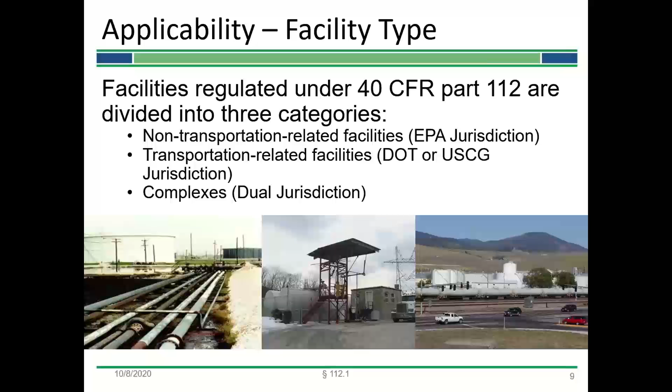All right, so first part of applicability is facility type. We look at facility type based on three categories, which are non-transportation related facilities, transportation related facilities, and complexes. So let's discuss each in a little more detail.

Non-transportation related facilities are those at which EPA has jurisdiction, and these are going to include the fixed or mobile onshore and offshore drilling and production facilities, oil refining facilities and oil storage facilities, various types of facilities that store and use oil on site, waste or used oil treatment facilities, facilities that have equipment used to transfer oil in bulk to or from highway vehicles such as tank trucks or railroad cars, as well as transportation of oil by highway vehicles, railroad cars, and pipelines within the confines of a non-transportation related facility.

Transportation related facilities are those that are going to have jurisdiction by either the Department of Transportation and PHMSA through them, or the Coast Guard. Examples include terminal facilities with equipment to transfer oil in bulk to or from a vessel, including the reception and storage of any oily ballast water.

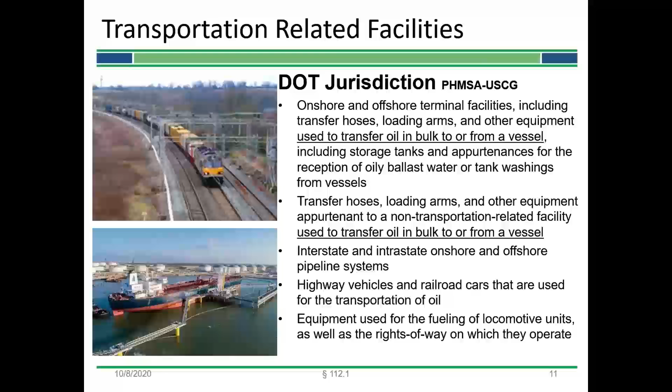Also includes the equipment at a non-transportation related facility that is specifically used to transfer oil in bulk to or from a vessel. This would also include any pipeline systems, highway vehicles such as tank trucks and railroad cars that are used for transporting oil, and equipment used to fuel locomotive units.

Now, complexes are going to be a combination of these, and a facility that has both transportation and non-transportation related components will be considered a complex. And based on the type of activities being conducted there, the facility would then be subject to jurisdiction by more than one federal agency.

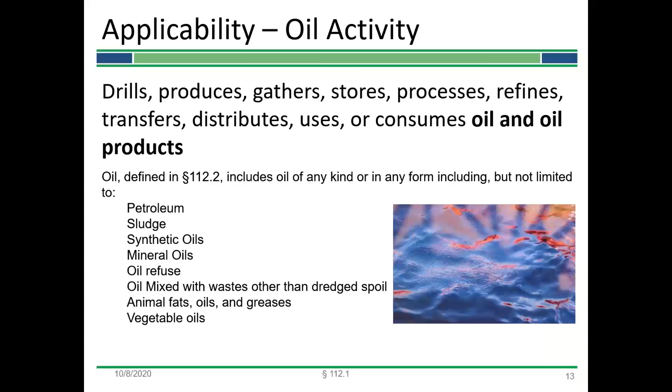The next part of applicability we're going to look at is the oil activity. So applicable activities are drilling, producing, gathering, storing, refining, transferring, distributing, using, or consuming oil and oil products. And when we're considering what is an oil for these activities, the rule defines oil to include oil of any kind or any form, such as petroleum, sludge, synthetic oil, mineral oil, animal fats and related products, and vegetable oils.

The next key for applicability is the reasonable expectation, and this is covered in 112.1(b) of the rule. You want to look at if the facility can be reasonably expected to discharge oil in quantities that may be harmful into or upon navigable waters. And if you have any questions or want some additional information on navigable waters, these can be found at

epa.gov/NWPR. So as defined in the SPCC rule, a discharge is going to include any spilling, leaking, pumping, pouring, emitting, emptying, or dumping of oil, regardless of where it occurs. Now, there are some exemptions, though, such as discharges associated with Section 402 of the Clean Water Act and Section 13 of the River and Harbor Act.

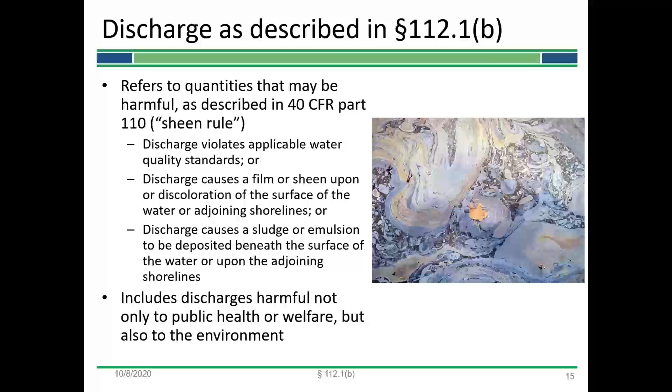So as I said, a facility has to be reasonably expected to discharge oil in quantities that may be harmful. And in this term, we refer back to the Sheen rule, so 40 CFR Part 110. May be harmful is considered as for discharges that violate water quality standards, cause a film, sheen or discoloration on the water surface, cause a sludge or emulsion beneath the water surface, and there could be others as well. And these include discharges that are not only harmful to public health and welfare, but also the environment.

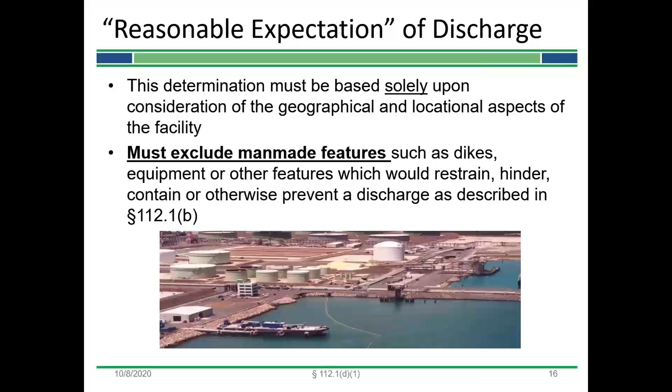So the owner or operator is going to make the determination of whether or not the facility has reasonable expectation of a discharge. When making this determination, though, it must be based only on aspects related to the geography and location of the facility. So any man-made structures like dikes and other equipment and features at the facility that would otherwise prevent a discharge or restrain it cannot be considered as part of that determination. Really important.

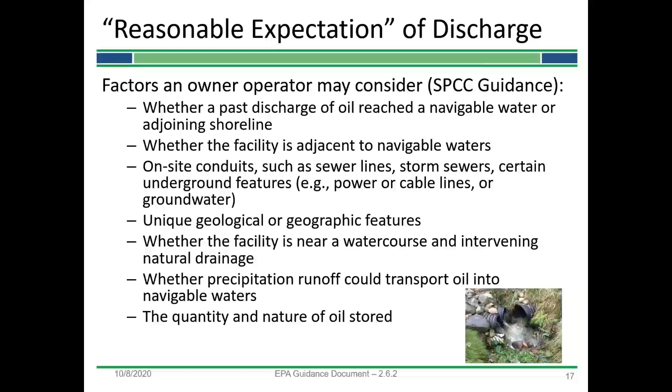However, the owner or operator may consider with this determination any past discharges of oil, if the facility is adjacent to a navigable water, any on-site conduits that could connect to a navigable water, like storm sewers and groundwater, any unique geological or geographic features at the facility, such as maybe the depth of groundwater or natural sloping, if the facility is near a waterway and any natural drainage, if precipitation could transport oil off-site, as well as the quantity and nature of oil stored at the facility.

Now, the last part of SPCC applicability is the threshold, and this is going to be the facility's total oil storage capacity versus the SPCC threshold. SPCC requirements are going to apply to those facilities with greater than 1,320 gallons of above-ground storage or 42,000 gallons of completely buried or underground storage. And in order to determine that total oil storage capacity, the facility needs to count all oil storage containers with capacities of 55 gallons or greater, and these would include oil-filled equipment. However, there are some exemptions that we're going to go over where certain containers would not need to be included as part of this calculation.

Now, when we look at storage capacity, we're referring to the shell capacity of the container based on its design. It's not going to be the operational amount of oil that a facility actually stores in the container. This is really important. And if a new container is brought on site and has never stored oil, it does not need to be included as part of that total oil storage capacity until it is brought into service.

There are exemptions for permanently closed containers as well, but the container needs to meet the definition of permanently closed under the rule. And this means that all liquid and sludge have been removed from each container and connecting line, and all connecting lines have been disconnected and blanked, all valves closed and locked, and conspicuous signage is posted on the container stating that it is permanently closed, not out of service, permanently closed, and the date of closure.

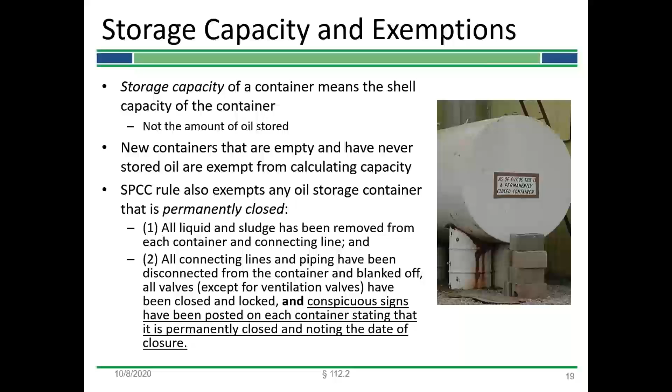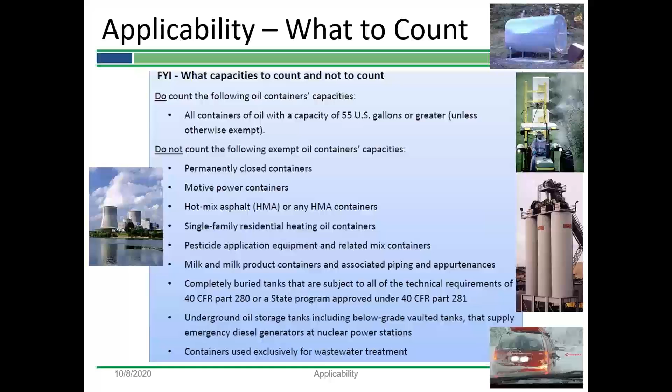So overall, when determining what to count and what not to count when you're making this calculation, as we discussed, you do want to count those containers with individual capacities of 55 gallons or greater. But you do not need to count containers that are permanently closed, like we discussed, as well as motive power containers, hot mix asphalt containers, single family residential heating oil containers, any containers used for pesticide application and mixing, containers that store milk or milk products, completely buried tanks that are subject to all of the technical requirements of EPA's UST program that's covered in 40 CFR Part 280, or a separate state program that's going to be approved by EPA under 40 CFR Part 281, USTs that supply emergency diesel generators at nuclear power stations, and any containers that are used exclusively for wastewater treatment.

In addition to SPCC applicability, a facility is also going to be subject to facility response plan requirements under the rule if they meet certain substantial harm criteria. And these are going to be based on storage capacity and level of harm. So according to the rule, a facility may pose substantial harm if it has 42,000 gallons or greater of total oil storage capacity and transfers oil over water, or it has greater than or equal to 1 million gallons of total oil storage capacity and meets at least one of the following conditions.

So greater than or equal to 1 million and lacks sufficient secondary containment within any above ground storage area, greater than or equal to 1 million and located at a distance where a discharge from the facility could cause injury to fish, wildlife, or sensitive environments, greater than or equal to 1 million and located at a distance where a discharge from the facility would shut down a public drinking water intake, or greater than or equal to 1 million and the facility has had a reportable discharge greater than or equal to 10,000 gallons within the last 5 years.

So facilities that meet this criteria would then need to prepare an FRP in addition to an SPCC plan. The FRP is going to have additional requirements and must be submitted to EPA for review and approval. And overall, all facilities must complete the certification of substantial harm found in the regulation and maintain this at the facility, regardless if they are FRP subject or not. This is going to be what documents that the facility has evaluated whether or not they meet that substantial harm criteria.

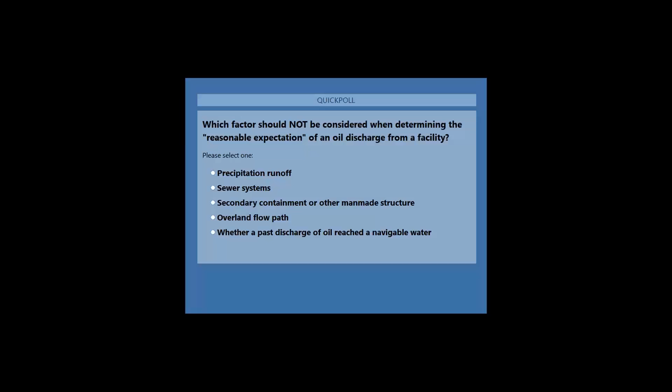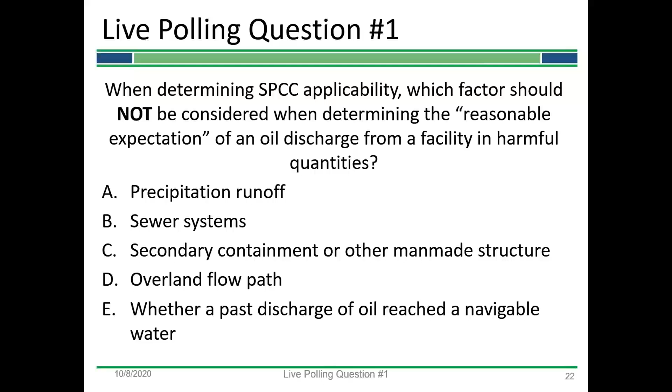Okay, looks like most of you guys were paying attention. The correct answer is going to be secondary containment or other man-made structures. So remember, when determining the reasonable expectation, you want to take into account any conduits. So sewer systems you would take into account. I see some people put sewer systems as the answer, but you do not want to take into account any secondary containment or other man-made structures that would otherwise hinder or restrain a discharge.

So moving on. So to cover part 2, I am going to turn it back over to Kim. All right, thanks, Heather. I'm going to cover subpart A of the regulation now. This applies to all facilities that are subject to the rule. And again, we're going to follow the sequence of the rule here for subpart A. So if you are required to be a facility that needs an SPCC plan, you need to prepare that plan in writing and in accordance with all applicable sections of the regulation. There are compliance dates for preparing, amending, and implementing a plan. And all facilities that are currently in operation should have a plan already prepared and fully implemented.

Now, if you are a new SPCC non-production facility, you have to prepare and implement a plan before you begin your operations. If you are a new production facility for SPCC, you must prepare and implement within 6 months of beginning operations. Now, unless your facility is a qualified facility, which I'll address shortly, a licensed professional engineer must review and certify the plan in order for it to effectively satisfy the requirements of Part 112. It's important to remember that a PE certification, though, will not relieve the owner or the operator of their duty to prepare and implement the plan.

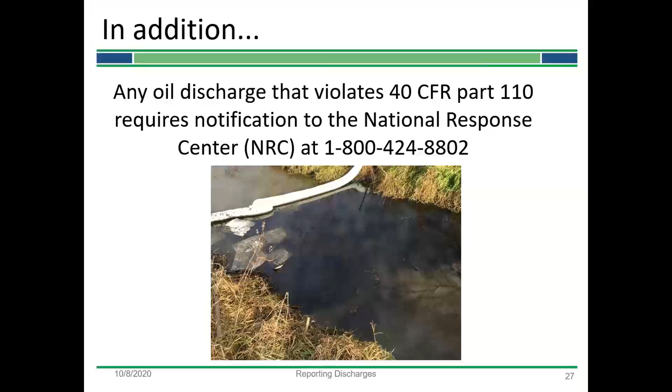However, that would need to be called into the National Response Center, because any oil discharge that violates 40 CFR Part 110, that sheen rule, requires notification.

Now, if there's a change at the facility that could affect the potential for discharge, like commissioning or decommissioning containers, replacing, reconstructing, or moving containers or piping, or if you have construction or demolition that might alter secondary containment structures, have a change in product or services, or if you revise your operating or maintenance procedures, you must amend your plan.

Now, these types of changes require what is known as a technical amendment to the plan, which must be prepared within 6 months and implemented as soon as possible, but no later than 6 months following the preparation of the amendment. And technical amendments require that a licensed PE review and certify those technical amendments in that plan amendment.

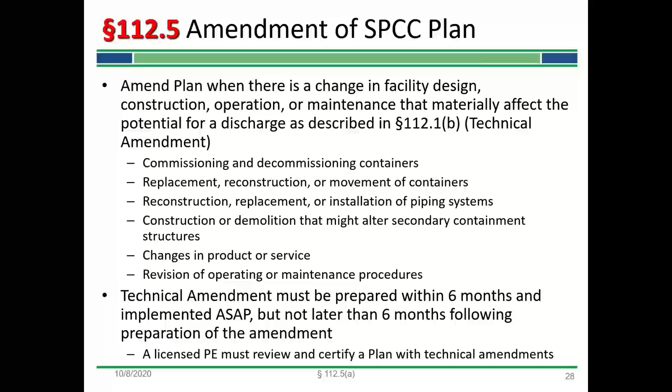You also are required to complete a review and evaluation of the SPCC plan at least once every 5 years. You must document the completion in writing and sign a statement as to whether you will amend the plan as a result of the review and evaluation.

So you might be asking what would require an amendment after you do a review. If more effective prevention and control technology is available that will significantly reduce the likelihood of a discharge, you must amend your plan within 6 months to include the new technology and implement the amendments no later than 6 months following the preparation of those amendments. Now, keep in mind that technical amendments will require PE certification.

However, amendments that are non-technical or administrative in nature, such as updating contact numbers or updating the facility diagram, do not require PE certification. As a general rule of thumb, if the amendment requires the application of good engineering practice, it will require PE certification. If the owner or operator is not sure whether a change is technical or non-technical, you should have it certified.

Now, smaller oil storage facilities may be eligible for streamlined requirements if they meet eligibility requirements. If you're a facility that has 10,000 gallons or less of total aboveground storage capacity, and you have had no single discharge exceeding 1,000 gallons or no 2 discharges exceeding 42 gallons in any 12-month period in the last 3 years, then you can qualify as a Tier 2 facility and you can choose to self-certify a full SPCC plan. So if you meet Tier 2 qualifications, you do not need a PE to certify your plan.

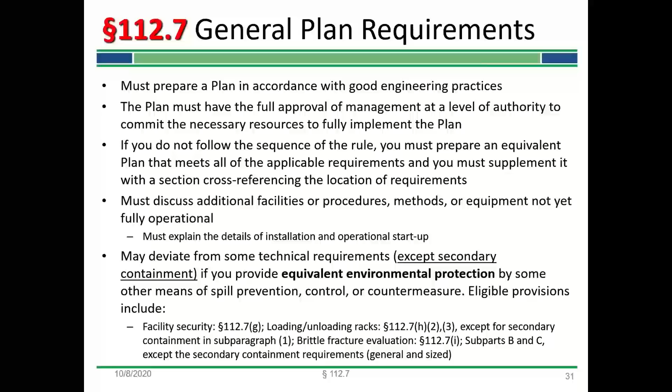In your plan, you need to describe the physical layout of the facility and include a facility diagram. On that facility diagram, you're going to need to mark the location and contents of each fixed oil storage container and any storage area where mobile or portable containers are located. Even if you have exempt underground tanks and pipelines at your facility, they still must be identified and marked on your diagram. And you need to provide enough details so that those reviewing the plan know how to undertake prevention activities, perform inspections, and take response measures.

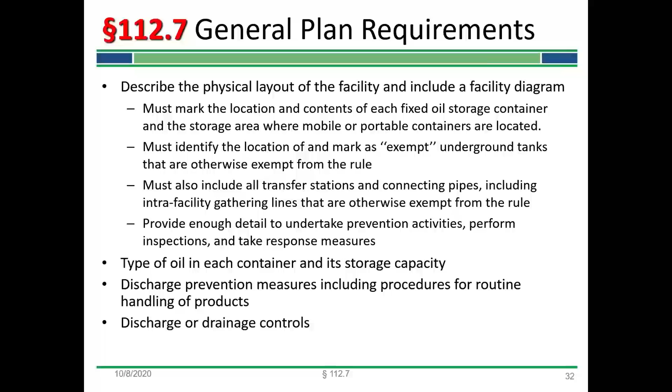The plan needs to include the type of oil that you have in each container and the storage capacity of each container. And the routine handling of oil products must be discussed and described, along with discharge prevention measures and discharge and drainage controls. In addition to describing how to prevent and control a discharge, you must address the countermeasures in place for discharge discovery, response, and cleanup. The plan also needs to address how you're going to dispose of those recovered materials, and you need to take into account state disposal laws. So make sure you're including discussions on that.

You need to include in your plan contact information for your facility response coordinator, the National Response Center, cleanup contractors that you have an agreement for a response, and all appropriate federal, state, and local agencies who must be contacted in case of a discharge. If your facility is not also a FRP facility, you must provide information for reporting a discharge, and you must organize the portions of the plan describing the procedures for when a discharge occurs so that they're readily available during an emergency. Remember, you don't want to be fumbling through various pages or sections of the plan to get the information you need during a discharge or during an emergency.

A major part of your plan is going to be the prediction of the direction, rate of flow, and total quantity of oil which could be discharged as a result of each type of major equipment failure. So you need to include predictions for things like your tank loading and unloading areas and equipment, tank overflows, ruptures or leakage, and any other equipment known to be a source of a discharge. You need to know, where is the discharge going to go? How fast is it going to go there? And how much is going?

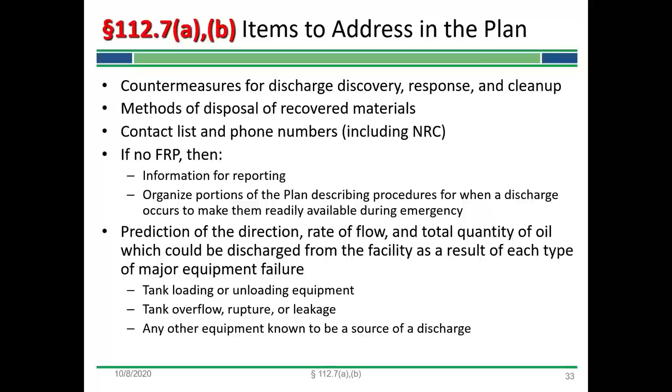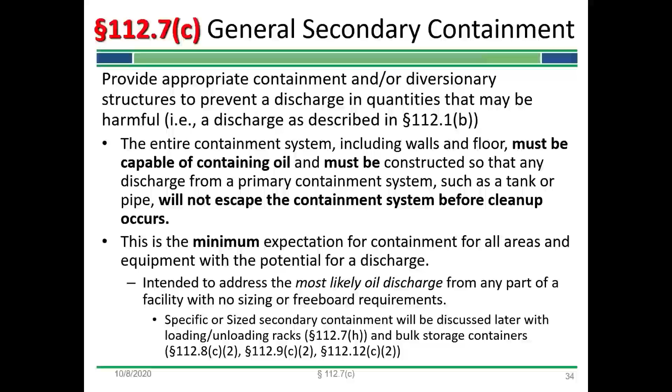Now, for all areas and equipment at the facility with the potential for a discharge, you need to provide appropriate containment or diversionary structures to prevent a discharge. So mobile refuelers, other non-transportation related tank cars, oil-filled operational or process equipment, transfer areas, piping, those all need appropriate general secondary containment, where the containment system must be capable of containing oil, and it must be constructed so that any discharge will not escape before cleanup can occur. General secondary containment is intended to address the most likely oil discharge from any part of that facility with no sizing or freeboard requirement, and this is the minimum expectation for containment. Specific or sized secondary containment will be discussed later in relation to loading and unloading racks and bulk storage containers.

General secondary containment can be passive or active or a combination of the two. Passive measures are permanent installations and do not require deployment or action by the owner or operator. Examples include dikes and berms, culverting at the facility, drainage systems, retention ponds, sumps, drip pans, curbing. Whereas active containment measures are those that require deployment or other specific action by the operator. These may be deployed either before an activity involving oil handling starts or in reaction to a discharge. So examples would be bringing out a drain cover that's near a transfer area and covering up that drain before you're starting to transfer your oil, having sorbent materials or spill kits nearby, hard boom, soft boom, or closing a valve that controls drainage either before or if a discharge is occurring.

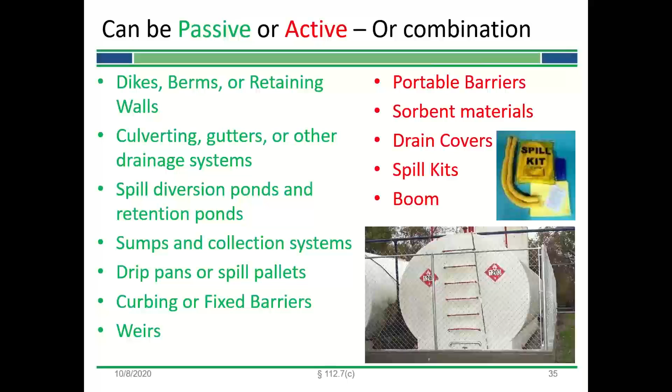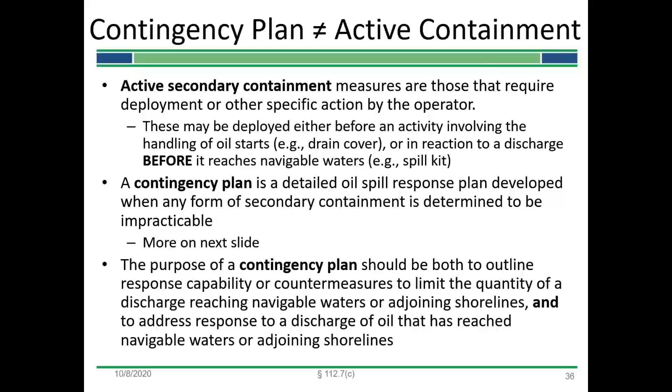Something else that we get asked quite a bit is whether a contingency plan would count as active secondary containment. Now, as I just said, active secondary containment are measures that are put in place before that oil activity starts or in reaction to a discharge before it's going to reach navigable waters or leaves the facility property. Whereas a contingency plan is a detailed oil spill response plan on how to address a discharge that has reached navigable water. So active measures are used to meet secondary containment requirements, while contingency plans are used when secondary containment is determined to be impracticable or when choosing to implement alternative measures for eligible oil-filled equipment, which I'll speak more to.

Now, the impracticability determination is intended to be used when a facility owner or operator cannot install secondary containment by any reasonable method. Now, considerations for this can include space limitations, if there's a local ordinance or fire code that would not allow for it, safety or other good engineering practice reasons why you cannot have secondary containment. Economic cost can be considered, but it can't be the only factor. You can't have an impracticability determination because it's too expensive. There needs to be other factors involved.

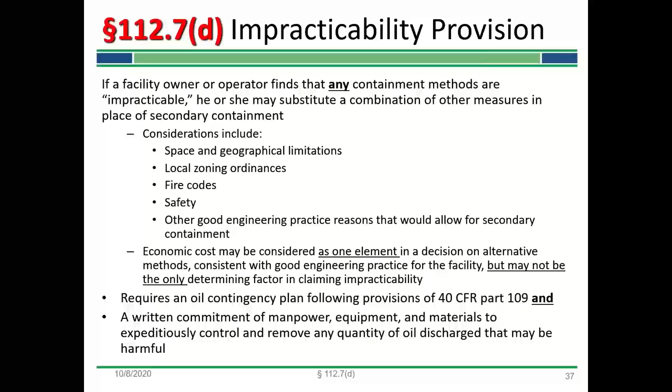If an impracticability determination is made, it must be clearly explained in the plan and certified by the PE. The owner or operator must prepare an oil contingency plan in accordance with 40 CFR Part 109 and provide a written commitment of manpower, equipment, and materials to control and remove the discharged oil unless that facility has submitted an FRP to EPA. There are additional requirements as well for integrity testing and leak testing if bulk storage containers are involved. Heather's going to handle bulk storage containers later on in the presentation.

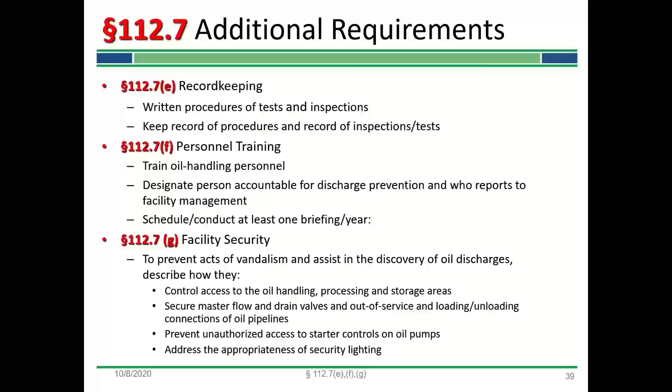You also have to take into account facility security. The plan needs to address how you control access to your oil areas, how you secure master flow and drain valves, how you're going to prevent unauthorized access to the starter controls on oil pumps, and you need to address appropriateness of security lighting at your facility. So think, how are you going to prevent acts of vandalism? And then what's being done or in place to assist in the discovery of a discharge? Those need to be included in your plan.

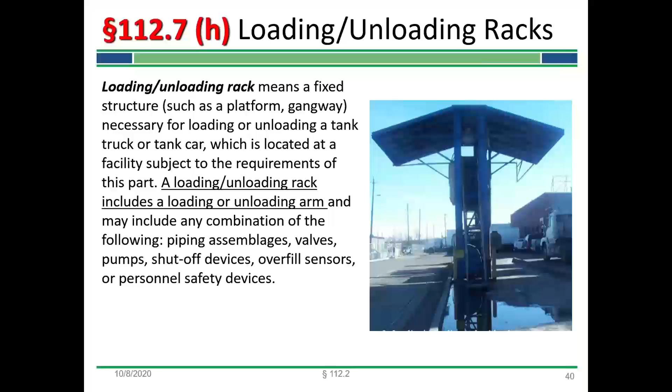Now, if your facility has a loading or unloading rack, then 112.7(h) applies to you. So what exactly is a loading unloading rack? Under the SPCC rule, it has a definition that it's a fixed structure necessary for loading or unloading a tank truck or car. So you may ask, what's the difference between that and a transfer area? Well, a rack includes a loading or unloading arm in that definition. So look for a loading or unloading arm in this area. If you have one, it's a rack. If you don't, you have a transfer area.

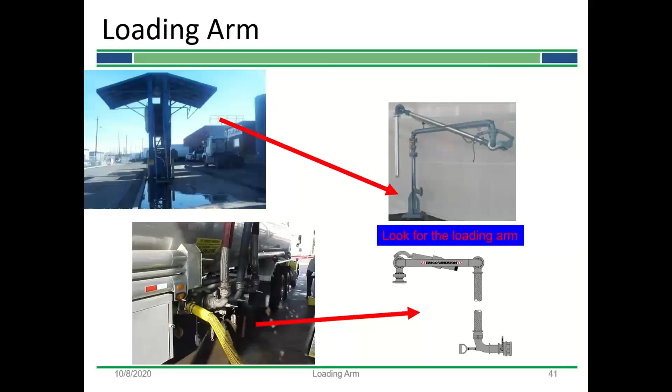So if you have that loading or unloading rack at your facility, the rule requires that you either have drainage to flow into a catchment basin, or you have the drainage to use a quick drainage system for the rack. If you don't have either of those, you need containment sized to hold at least the maximum capacity of any single compartment of a tank car or tank truck.

You'll also need to make sure that the tank truck doesn't, sorry, I got quick with the button.

You also need to make sure that the tank truck doesn't accidentally depart before disconnecting by providing interlock warning lights or physical barrier systems, warning signs, wheel chocks, or a vehicle brake interlock system. And then don't forget to inspect the lowermost drain and all outlets before filling and departure.

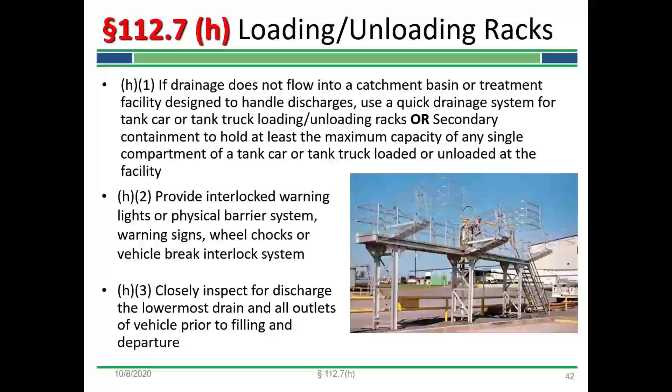Now, if you have field constructed above ground containers, you need to evaluate the container for risk of discharge or failure due to brittle fracture or other catastrophe, and as necessary, take appropriate action. You have to discuss conformance with any applicable more stringent state rules, regulations, and guidelines. Now remember, SPCC is a federal regulation. However, you do have to consider if there's more stringent state regulations that come into play, and you need to discuss those in your plan.

If you choose the optional alternative measures instead of secondary containment for the oil-filled operational equipment, you must establish and document an inspection or monitoring program to detect equipment failure or a discharge, and prepare an oil spill contingency plan and submit that written commitment of manpower, equipment, and materials, again, unless you have an FRP. Keep in mind, for this, there is no impracticability determination required for qualified oil-filled operational equipment. Again, no impracticability determination needed, and it's an option.

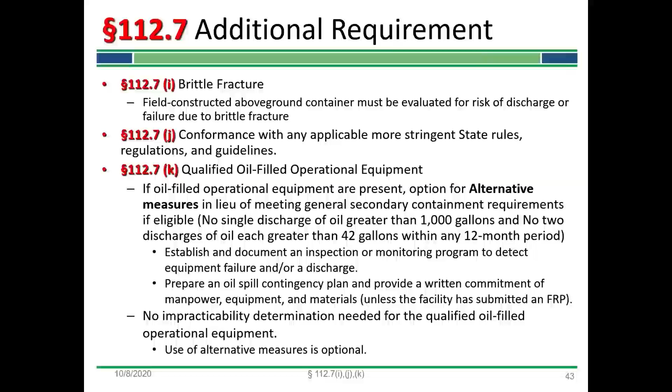So now I'm going to give my lungs a little break, and I'm going to hand it over to Heather, who's going to talk about subparts B and C of the regulation. All right, thanks, Kim. So I know we've already covered a lot today, but there's more.

Subparts B and C of the rule cover requirements for facilities based on the type of facility and type of oil stored. Now, subpart B is going to include those requirements for facilities that store petroleum and non-petroleum oils, while subpart C is going to cover animal fats and vegetable oils. As I mentioned, these parts are each going to outline requirements for the specific facility type, including those requirements for facility drainage, the many requirements for bulk storage containers, and the requirements for facility transfer operations, pumping, and facility processes.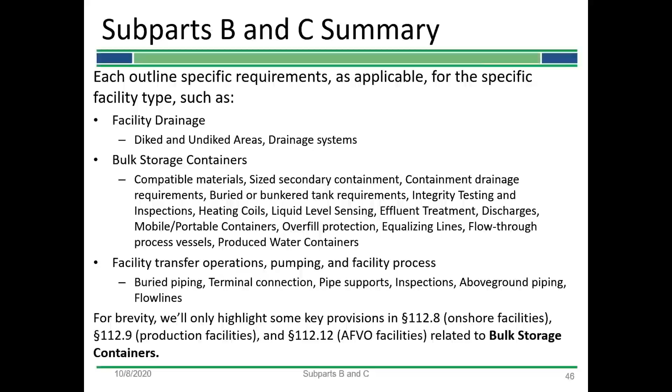Subparts B and C cover a lot, and we really wish we could cover this in more detail. But, due to our limited time, we wanted to make sure we cover some of the key provisions specific to bulk storage containers today. And those are going to be found in section 112.8 for onshore facilities, 112.9 for production facilities, and then we're going to touch on those for animal fat and vegetable oil facilities in 112.12.

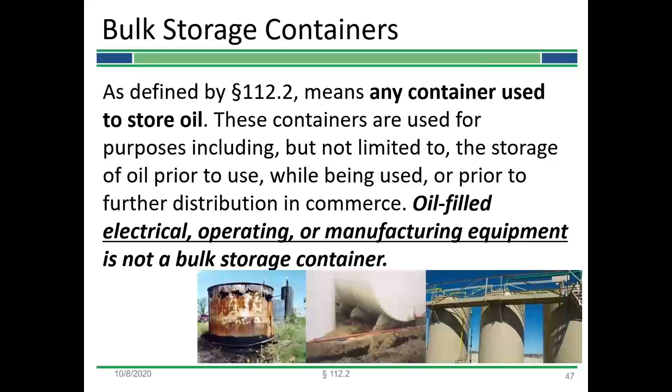So first, it's important to know what is a bulk storage container. And as defined under 112.2 of the rule, a bulk storage container is any container that is used to store oil. And these are going to include those that store oil prior to use, while being used, or while waiting to be transported or distributed in commerce. It's also important to keep in mind that oil-filled electrical equipment, oil-filled operational equipment, and oil-filled manufacturing equipment are not part of this definition. They are not considered bulk storage containers and do not apply to the bulk storage container requirements of the rule.

One of the key requirements for bulk storage containers at SPCC facilities, and it's a fun one, is integrity testing. This requirement applies to the larger field-erected tanks, smaller shop-built tanks, any partially buried or bunkered tanks, as well as any container at the facility that stores oil, even the mobile or portable containers and drums. The owner or operator is required to test or inspect each above-ground container for integrity on a regular schedule, as well as when material repairs are made to that container.

Rather than requiring a certain type of testing or inspection to be performed, the rule does give the flexibility to the facility and the ability to use industry standards to determine both who will be conducting these tests and inspections and the type of inspection, as well as the frequency they are conducted and the industry standard used. So this is going to be relative to the container size, configuration, and design. Some common industry standards used include API 653 for field-erected tanks and STI SP001 for shop-built tanks.

It's important to note that for animal fat and vegetable oil bulk containers, those covered under 112.12, certain containers are not subject to the integrity testing requirements. If the animal fat or vegetable oil container is subject to the Food and Drug Administration requirements under 21 CFR Part 110, they are also elevated, constructed specifically of austenitic stainless steel, do not have external insulation, and are shop built, so meets all those requirements, then the facility could instead conduct formal visual inspections of these tanks on a regular schedule, as well as frequently inspect the outside of the containers for any deterioration, discharges, and any accumulation of oil inside diked areas.

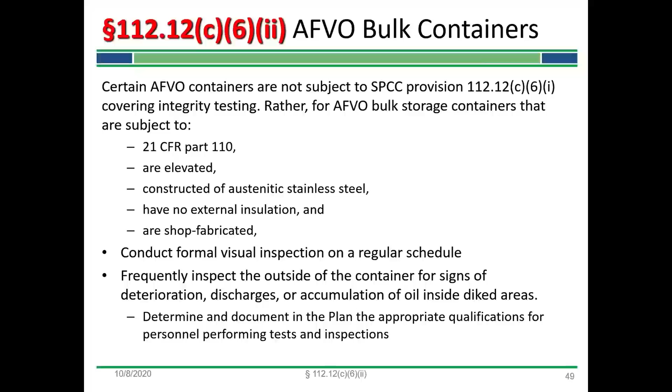It's important to know that the facility does still need to determine and document in the plan the appropriate qualifications for these individuals conducting the visual inspections. That's just important to note.

Another key component to subparts B and C, and it's an important one, is sized secondary containment. Kim spoke briefly about general secondary containment and specific or sized secondary containment as it applies to loading and unloading racks, but we're going to go over how it applies specifically for bulk storage containers.

Now, sized secondary containment for bulk storage containers must be designed to hold the capacity of the largest tank within the containment area. It also needs to account for any precipitation that's expected to take up space in the containment, also called freeboard. EPA doesn't specifically specify what the requirement is for freeboard, but generally either 110% of the capacity of the largest tank in that containment area is used, or the maximum level of precipitation after reviewing a 24-hour, 25-year storm event.

Secondary containment must also be sufficiently impervious to contain discharged oil, and the PE and owner-operator have the flexibility to best determine how to meet this. Some examples of sized secondary containment would include dikes, containment curbs, and pits. Facilities may also use alternative systems that include features such as a catchment basin that will stop a discharge and safely confine it within the facility.

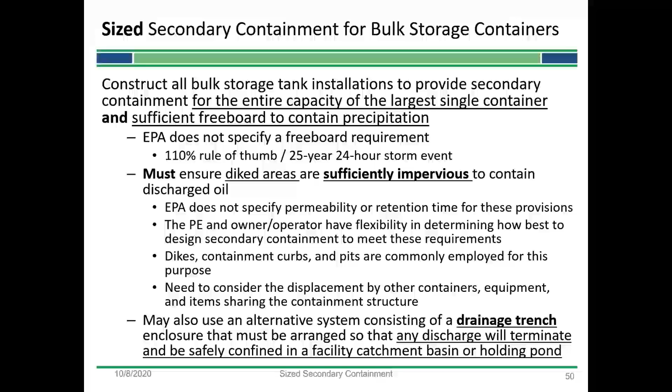And it's also important to note that when you're calculating the sized secondary containment for the bulk storage area, you also need to consider displacement by any other objects or equipment or containers that take up space within the containment structure.

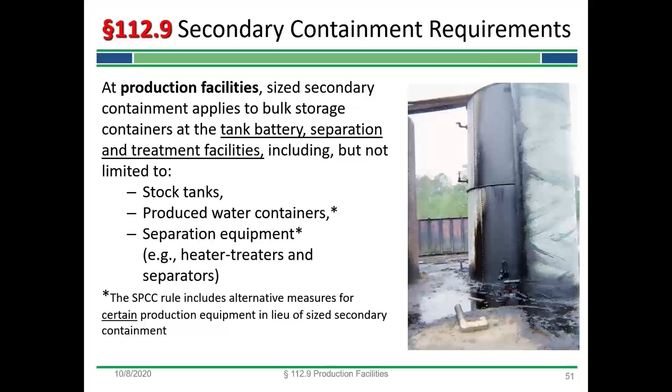For production facilities, we just wanted to touch on one little thing that was important to note. Sized secondary containment applies to bulk storage containers at these production facilities under 112.9 as well. But for certain production equipment, such as produced water containers, alternative measures may be used instead.

And that brings us to our last live polling question, number 3. That's going to take into account a little bit of what Kim covered and a little bit of what I just covered. So which of the following requires general secondary containment and not sized or specific secondary containment? Is it loading or unloading racks, transfer areas, bulk storage containers, mobile or portable storage containers, or stock oil tanks at an oil production battery?